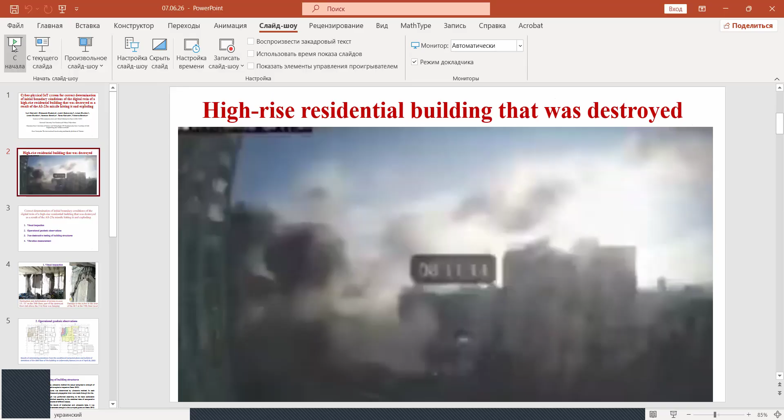On the second slide, you can see the high residential buildings that were destroyed. This is a building which will be investigated. This is a Russian missile AS-23a.

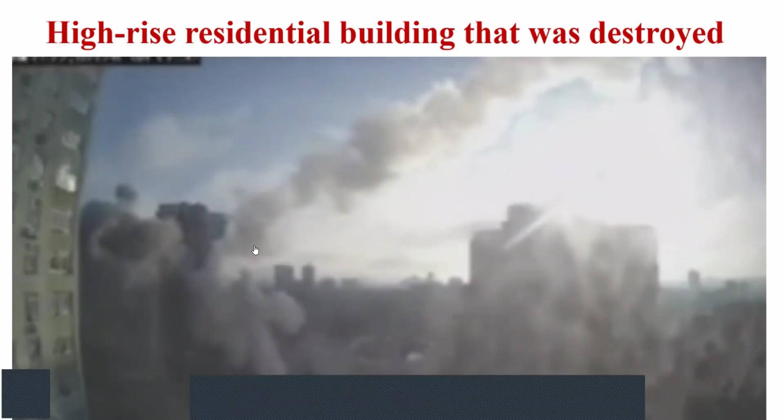Correct determinations of initial boundary conditions of the digital twins of a high residential building that was destroyed as a result of the AS-23a missile hitting it and exploding. It consists of 4 steps. First, visual inspection. Second, operational geodetic observations. Third, non-destructive testing of building structures. And fourth, vibration measurements.

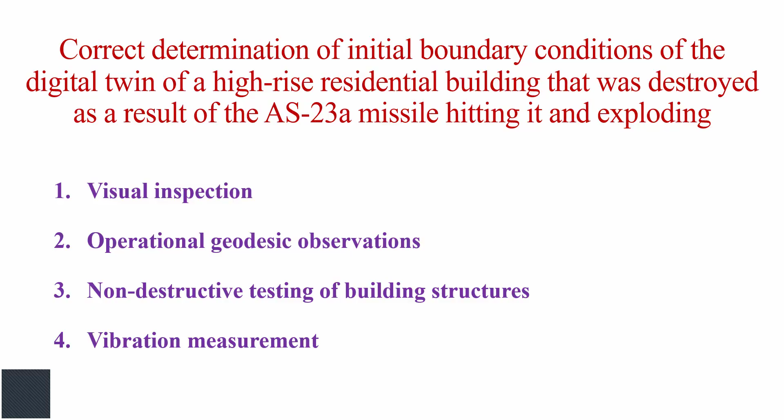In the first step, visual inspection, you can see building constructions of high residential buildings were destroyed by missile attack. The destructions and deformations of pylon in axis 2F, 3F on the 20th floor where part of destroyed floor slab of the 21st floor was hanging. You can see absence of some walls on this floor. And these are some rings which will support the top plate.

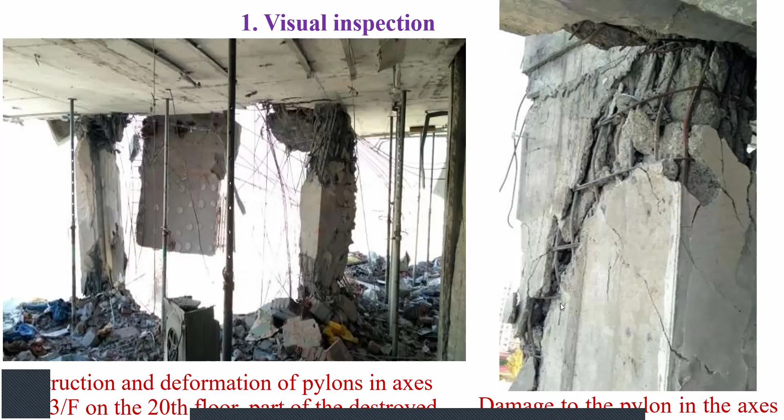On the second building, you can see damage to the pylon in the axis of G2 at the 19th floor level. You can see the cracks on the pylon. After visual inspections, we conducted the geodetic observations. On this slide, you can see results of determining deviations from the conditional horizontal plane and isofields of deviations of the 25th floor of the building on Lobanovsky Avenue 6A as of April 26, 2022.

On the right side, you can see isolines of different areas. These are vertical deformations. In yellow color, you can see vertical deformations from 0 to 50 millimeters. In green color, vertical deformations from 50 to 100 millimeters. In blue area, vertical deformations on this plate from 100 to 150 millimeters. In red area, deformations from 150 to 200 millimeters. In these parts, you can see deformations from 200 to 250 millimeters.

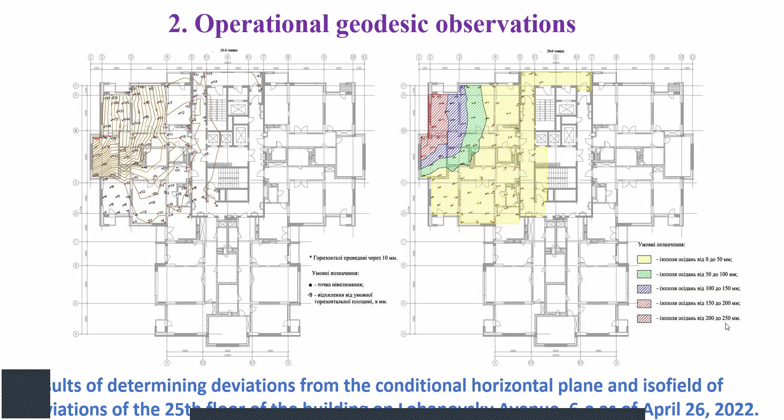After conducting the geodetic observations, we conduct non-destructive testing of building structures. The research task is to determine by ultrasonic methods the actual compressive strength of concrete in pylons that were subjected to explosive impact on floors 18-21. The strength of concrete in structures was determined by the ultrasonic method. In each structure, 10 measurements of ultrasonic propagation time were made through the ribs.

The calculation of concrete strength was performed according to the basic calibration dependence time-strength, established according to the statistical data of comparative mechanical and ultrasonic tests of concrete of different classes. As a result of generalization of the results of mechanical and ultrasonic tests, it was established that the average value of concrete strength in the surveyed pylons of floors 18-21 in axes 1-4/E-K is in the range from 16.6 megapascal to

33.6 megapascal. This indicates that the actual strength of concrete in controlled pylons is lower than the design strength for concrete of Ukrainian class C25/30. The average strength is 38 megapascal. If you compare the 16 value with the 38 value, you can see a reduction of approximately 50% from this value.

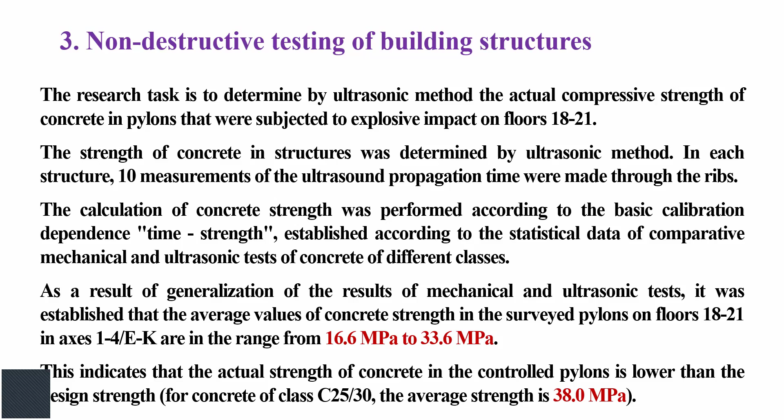The next stage, the vibration measurements. On this photo, you can see destroyed parts of a building, and this is a graph which demonstrates the sensors displayed on the 22nd floor, 16th floor, and first floor. And we conducted the vibration measurements in this area.

The vibration acceleration sensors were arranged during the 27-story building inspections at 6A Lobanovsky Avenue with damage on floors 18–21. Accelerometers are connected at the 22nd, 16th, and 1st floors.

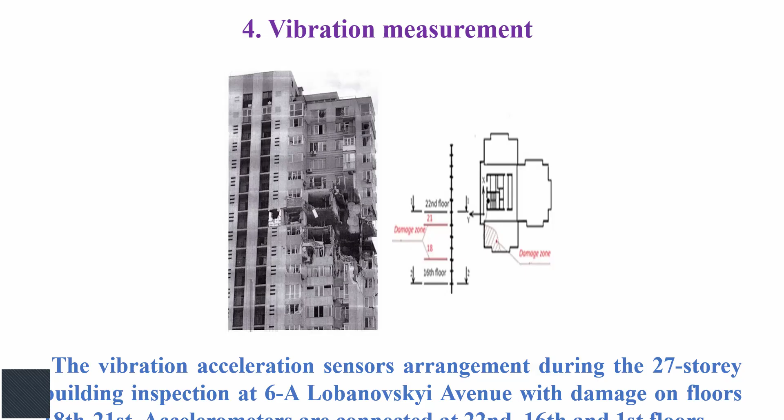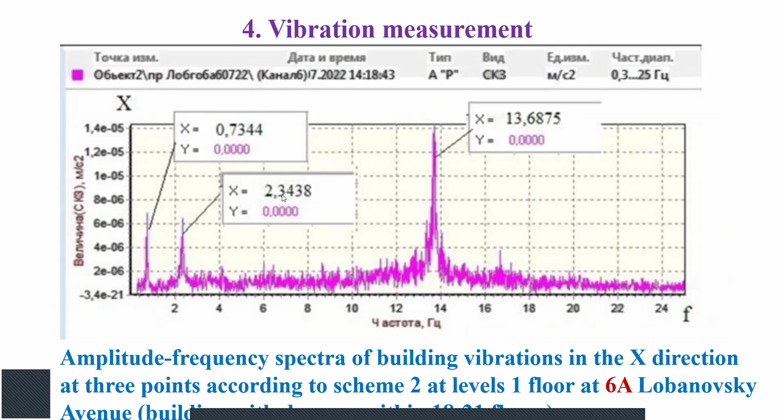You can see the slowdown of the natural frequency of the building on the first floor, which is the result of the destruction process in the whole building. The cracks exist in all floors of this building, and this is a very bad prognostic result.

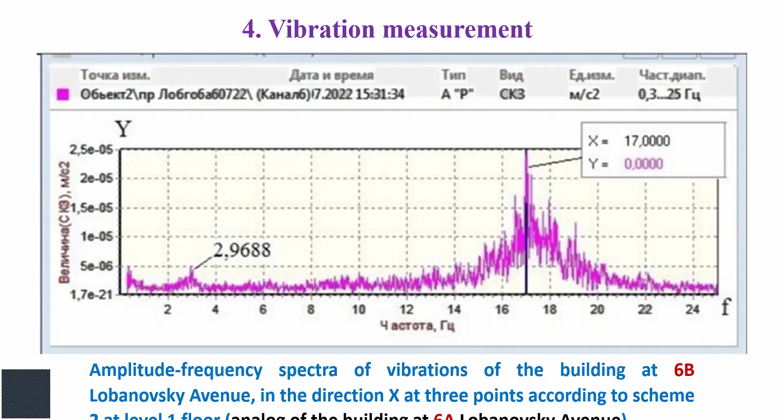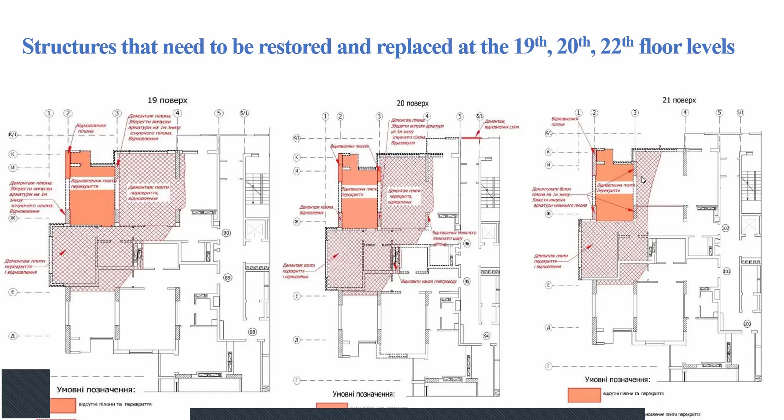Conclusions. First, visual inspections of the elevated structure and other elements show signs of damage and destruction. The destruction occurred with the collapse of the corner parts of the building in axes 1-3 E-K within the range from 18 to 32 floors. The load-bearing and enclosing structures within the range from 17 to 27 floors were significantly damaged.

Second, as a result of engineering and geodetic measurements, it was established that in the area of the building damaged by the explosions, deviations from the conditional horizontal plane of the 25th floor reach 241 millimeters. The maximum deviations are concentrated in the area of damage. The relative difference in vertical displacements is 9 times higher than the permissible one.

Third, the average value of concrete strength in pylons near the destruction zone of floors 18-21 is in the range of 16.6 MPa to 33.6 MPa. The actual strength of concrete is lower than the design 38.0 MPa. The decrease in the actual strength of the concrete could have occurred due to damage to the concrete structure from the impact of structures during the explosions and vibrations of the frame due to numerous breakages of the reinforcement of the structure, impacts from the fall of large fragments, etc.